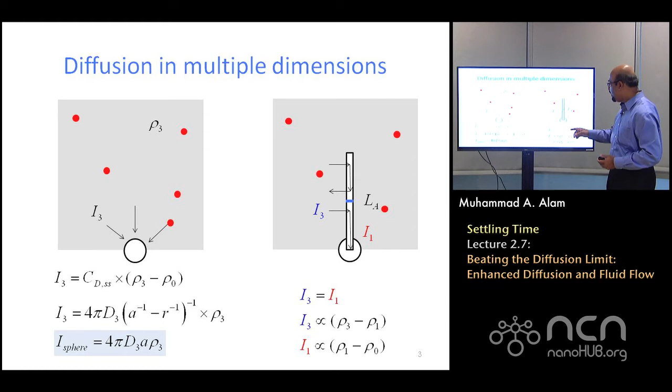We can easily calculate the first flux, since we've previously done the nanowire sensor. Remember when the flux came directly to the nanowire sensor? All we had to do was calculate the capacitance from 3 dimensions to 2 dimensions, essentially a cylindrical capacitance of R divided by A. A is the radius of this cylinder, and LA is the length over which the flux, once particles are captured, is directly transported to the spherical sensor. LA is not the physical length of the whole thing, because particles captured here are re-released, so it's as if they didn't count or didn't exist.

That's I3. What about I1? We have to think about it a little differently. Consider some particles coming in at a distance x from the sensor surface. They diffuse in one dimension from there to the sensor surface, and we'll call that Jx. The injection could occur at any x, so we integrate over it, and we multiply by 2 pi a to account for the surface of the cylinder itself.

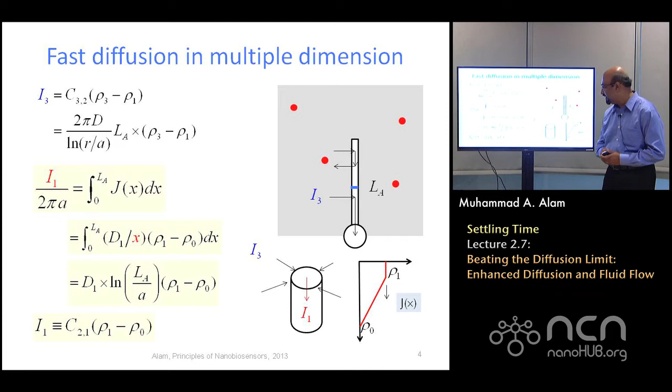Once you evaluate these two quantities, this is the diffusion equivalent capacitance in 1D. Rho 1 minus rho 0 is the density difference between these two points, and you integrate it out to get an expression for I1. Once you calculate I1 by integrating from 0 to LA, and you already know I3, you can equate them and find the value of I1, the flux to the spherical sensor.

This is relatively simple. We have the known values from the previous slide, C32 and C21. You equate them, eliminate rho 1, and directly calculate the value for I1. Now here's the trick: if diffusion on the cylindrical surface is faster than diffusing around in the volume, then D1 is significantly larger than D3. Substituting that approximation immediately gives an expression where C21 drops out, because this diffusion is so much faster that it's no longer limited by that process.

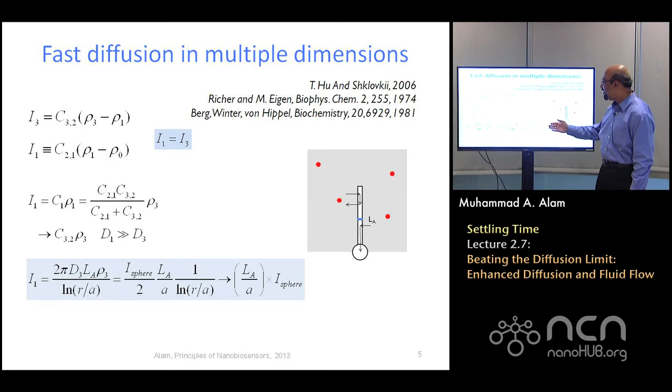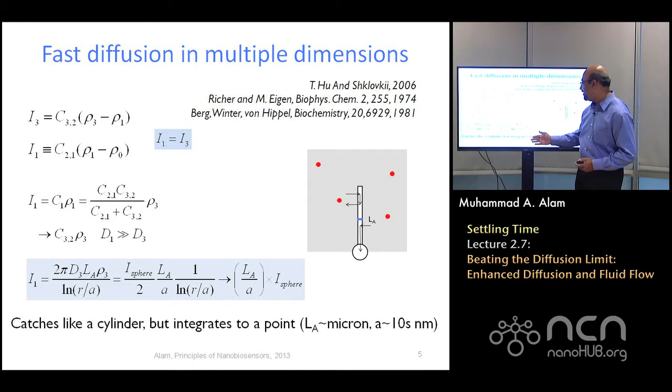It's essentially just limited by how long it takes for the molecules to swim in 3D and get collected by the nanowire itself. Once you substitute the expression for C32 and simplify, out comes a beautiful result: compared to the spherical sensor alone, putting this nanowire on top amplifies the total number of particles captured by the ratio of the capture length to the radius. If that turns out to be a factor of 100, we get a factor of 100 amplification in the flux rate. It catches like a cylinder, but integrates to a point, hence the amplification.

This actually appears to have deep roots in biophysics, this strategy of finding or diffusing to a target faster than you'd otherwise think possible. For example, you may remember from the second lecture we discussed DNA as a long polymer. Here is my DNA, a long green polymer, and on one segment there is a target, and this particular protein is looking for that target operator.

The protein could search for this place on its own by looking for the target in 3 dimensions, never landing on the DNA itself, interrogating it point by point. But it turns out there's a much better strategy: first land on the DNA, then slide along, and after a bit get detached, jump to a different segment of the DNA, and keep doing this. As long as this 1D diffusion along the DNA is faster than diffusion in 3D, it finds the target much faster.

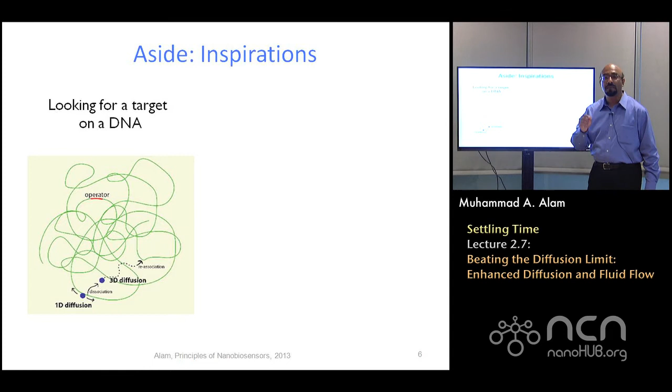Sounds complicated? Actually not. If you lost a child in a city that has subways, you wouldn't go around randomly walking in the city looking for the child. It's much easier to look for the child a little bit somewhere, hop on the subway, randomly get off at some other point, and look for the child again.

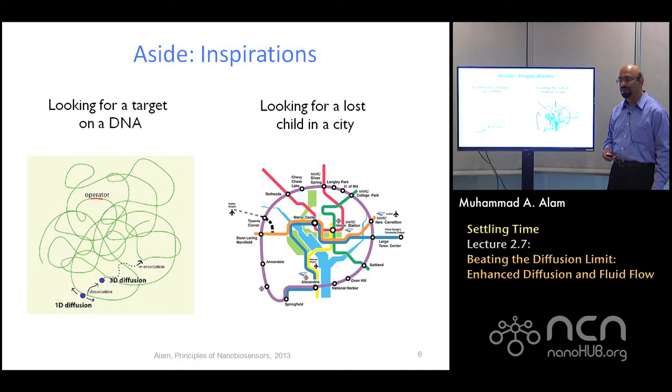So this interaction between 3-dimensional search and 1-dimensional fast transport is the essence of the amplification that let us beat the classical diffusion limit discussed in previous lectures. That's it, 3 techniques I told you about. There are others, but for now, these 3 approaches should give you an idea of the research directions people are taking.

Let's go on to the final topic, which has to do with how to bring the molecules to the sensor.

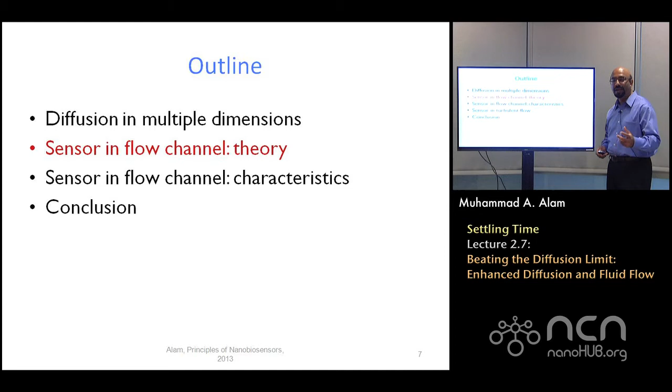Assume you have a sensor sitting in the middle of a flow channel, with fluid coming from one reservoir and going to the other. The molecules in the reservoir are very rare, and the fluid will bring the molecules to the sensor surface. You might think this would be better, because instead of sitting around like a jellyfish, the flow is bringing the food to the jellyfish directly. Wouldn't it be better? Wouldn't a nanosensor benefit from it?

You might think the answer is yes, but a little closer thought tells you the answer isn't so obvious. Because when the molecule is coming to the sensor fast, that's true, but the molecule is also going away from it fast, which counterbalances it. Do I win at the end of the day?

To answer that question, in the next 3 or 4 slides I'd like to do a simple calculation. Assume I've rotated the sensor, which has a rectangular cross-sectional flow channel, sidewise, so I'm looking at it from the side. The sensor is on the bottom, which was the circular disc. From the side it lies flat like a squashed rectangle. The fluid flow goes from 0 on one edge of the plate to the other edge, following a parabolic flow profile.

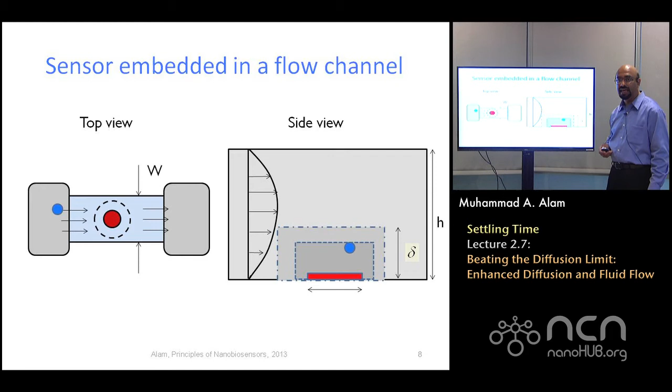But how big is delta, and how much enhancement do I get? Here is a relatively simple calculation.

To understand this calculation, let's quickly define a number called the Peclet number. It is essentially a ratio: if you did something versus if you didn't do anything. If you did something means you had a certain flow rate Q, divided by if you just allowed it to diffuse with no flow. The relative enhancement of the flow rate with respect to pure diffusion is given by this number.

Now, A is the radius of the disk, H is the height, and W is the width of the channel.

After some specific calculations are done, your result will be something like this: rho naught AD. If the velocity or flow rate was extremely small, then the result is essentially the same as that of a diffusion case. You can immediately see that.

Forget about when the Pe is small, I can drop these two terms. You can see 4 rho naught AD is essentially the diffusion result we have seen before for a disk sensor. However, if the flow rate is significant, where Q is large, Pe is large, in that case you can get a significant gain with a cube root of PE.

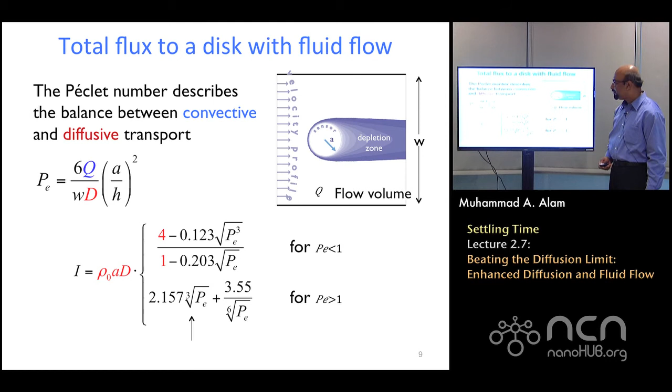Let me explain how that comes about. In order to understand how that comes about, you can compare two situations.

4 pi was there when it was a sphere or hemisphere. Here it's a disk, and you can look it up in any book, the capacitance of a disk in an infinite medium, and then it will be 4 D rho naught, 1 over A and 1 over R.

And the maximum value that this disk can get purely under diffusion will essentially be the diffusion. When the diffusion front is relatively large, I can drop it, and the maximum value would simply be given by 4D rho naught A. Let's say that's my value.

Would this be significantly better? The answer is yes, because this R will no longer go to infinity. Now the R will be pegged at the thickness of the stagnant layer.

So instead of simply saying A plus R, with R set to infinity, I will simply have A plus delta being the extent of R. And once you put it in, we'll get a ratio of these two quantities. And the relative enhancement of the flux, if you take the ratio of these two quantities, will simply be A over delta, essentially of that order.

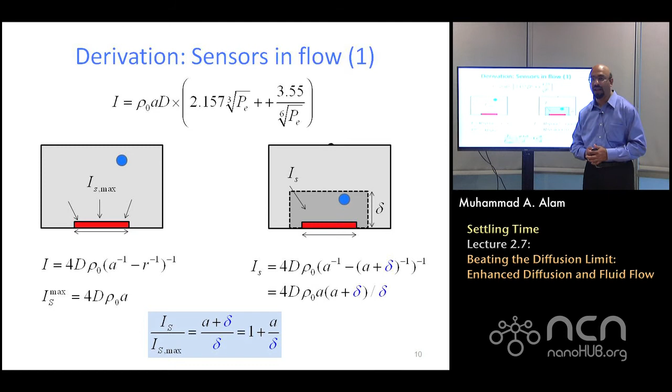Let's calculate very quickly. These are relatively simple calculations. We want to calculate what the value of A and delta is. My goal is, I already know A, the size of my sensor. Delta is what we are after.

So I want to know what the velocity at the top of this stagnant layer is. How do I do that? If I know the rate of change of velocity, I can multiply with delta. And once I calculate it, I will get an expression that relates the flow rate to the velocity and other geometrical factors.

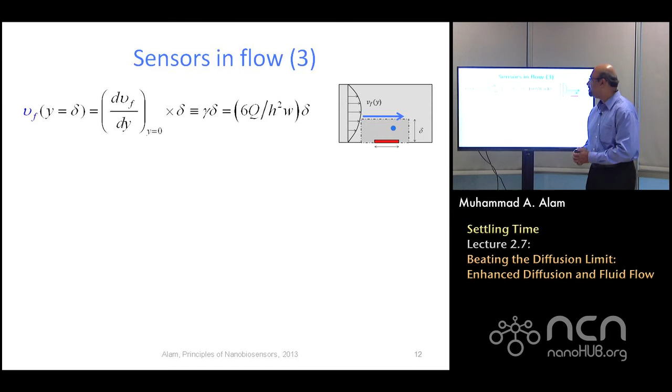Then you have to make a spatial argument. And the argument is the following: that the time it takes for a molecule to go from one side of the sensor after arriving, before it leaves the sensor and goes away forever, versus the time it takes to diffuse down and get captured by the sensor surface, these two times must be equal.

It's only then there will be a capture, because if the diffusion time takes too long to get to the sensor surface, it will simply disappear forever and it will never be captured.

So therefore, that argument is simply reflected by this: if delta is the distance, then the diffusion time is delta squared over 2D, and the transport time, tau c, is the size of the sensor divided by the velocity of the fluid.

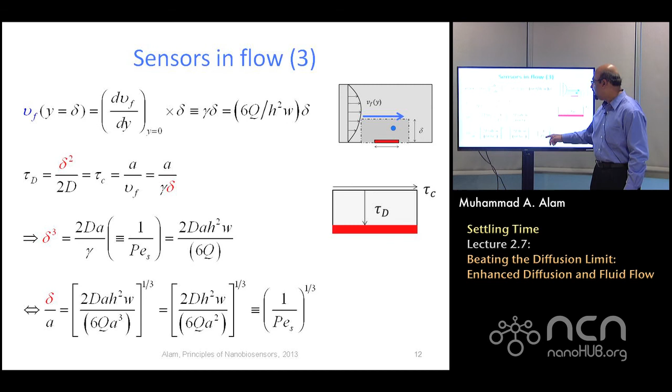And the velocity of the fluid I already know. I put it in, solve for delta, and there is my expression for delta over A, which goes as the Peclet number to the cube root.

So to wrap this discussion up, all you have to do now is put this expression in here. Imax I already know from the previous calculation. So once I put it in, I will get an expression that has the flux in terms of the flow parameters. You can take a log and see that if your diffusion coefficient is faster, you have larger flux. If you have higher flow rate, larger flux, and smaller cross-sectional area, obviously larger flux, and so on.

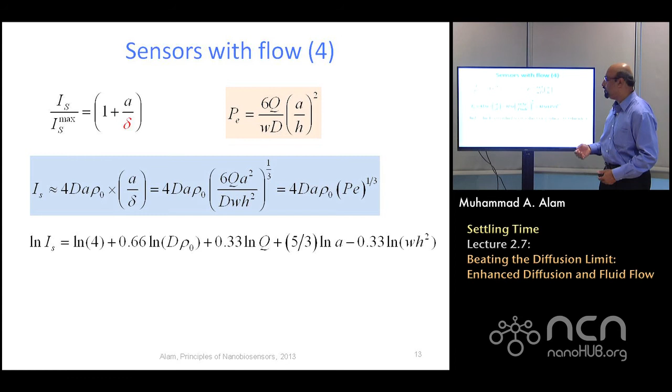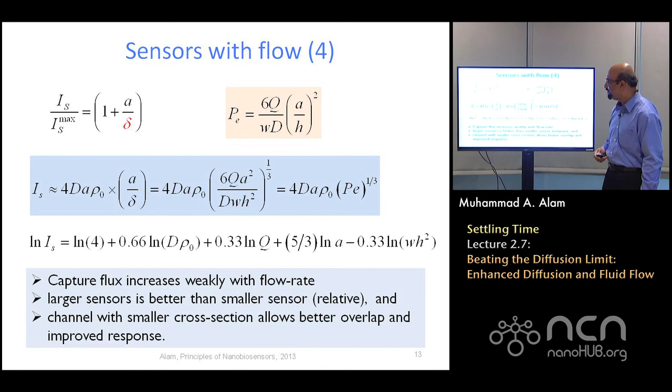But the relative improvement is what we are after. In a biosensor, does the flow help or not? Once we have the expression, we can answer this question. And there would be a big surprise for us. Let's see what we mean by that.

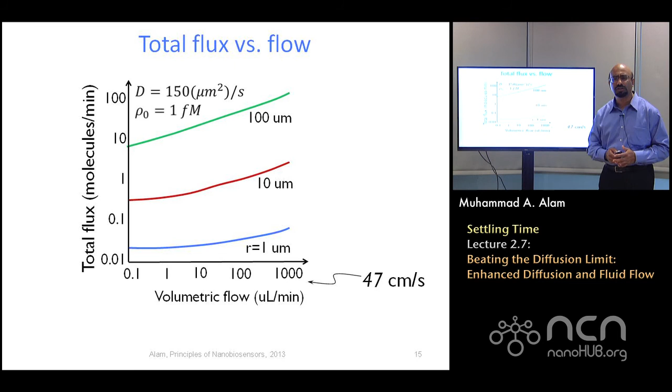Tremendous, that's significant. But as you go to the nanoscale, what you begin to see is that as your radius goes from 100 down to 1 micron, many of the nanoscale sensors are of that order, the relative gain, even at very high flow velocity, is inconsequential, very, very small. What's going on here? In fact, you'll see that this happens almost everywhere.

And the reason, which I'll explain a little later, is this delta relative to A. You see these two things: for nanoscale sensors, A is very small, so in order to get considerable enhancement, you have to make delta also very, very small in comparison. That means impractically high velocity, and therefore you don't get as much enhancement in the practical case.

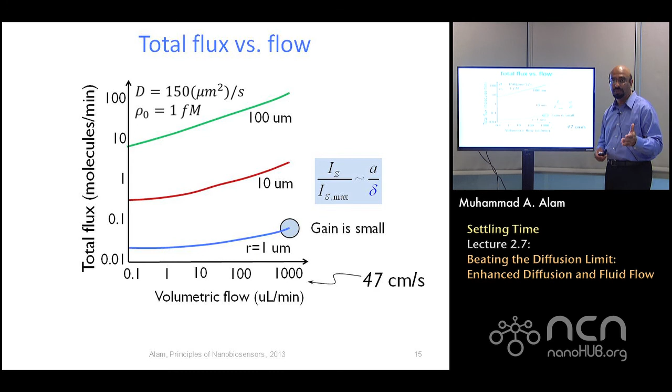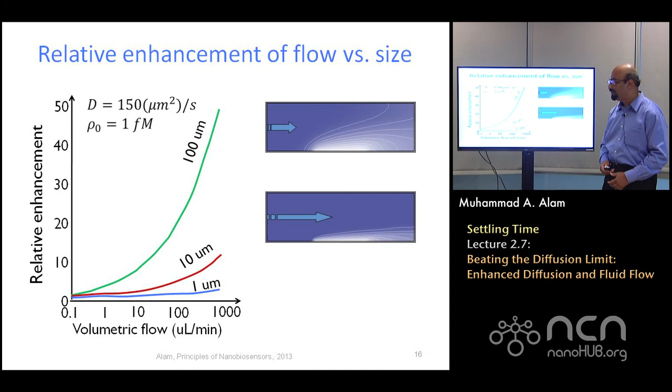You could plot the relative enhancement to check out how significant the gains are. The relative enhancement for 1 micron, as you can see, is essentially negligible. Yes, for larger sensors there's significant gain, but for smaller sensors, the blue line, not very much at all.

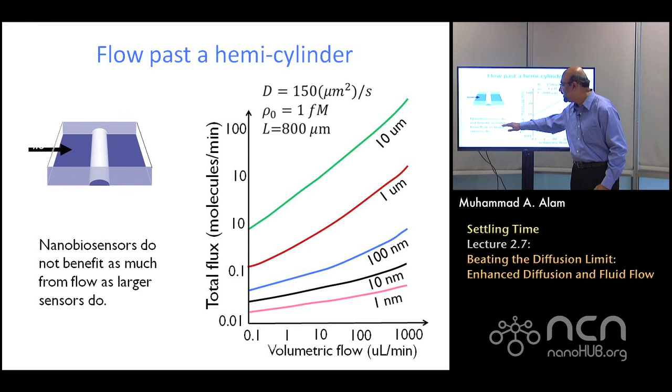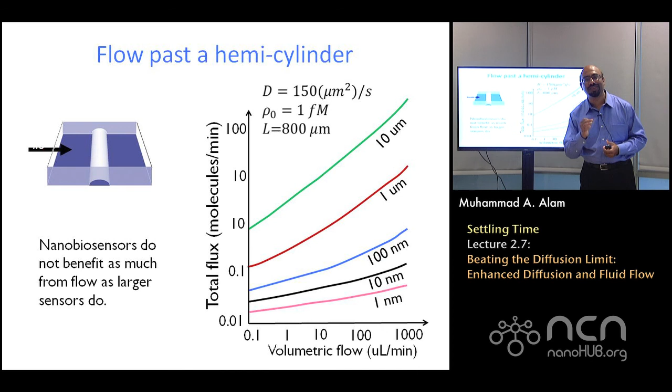So if you put, for example, cylindrical nanowire sensors in a flow channel, you'd see that as you go from 10 microns to 1 micron down to 1 nanometer, the gain is very small. And therefore, the main conclusion I want to draw from this analysis is that large-scale sensors benefit a lot from flow, but for small nanoscale sensors, putting them in a fluid channel, to the 0th order, doesn't give you very much. Let me conclude then.

The first topic I discussed today was this dimensional modification, allowing capture from 3D into a cylinder, letting it slide down on the cylinder, and then be captured by the nanosensor. That gives considerable enhancement, and this is biomimetic in the sense that in biology, DNA-binding proteins detect targets in the DNA exactly the same way.

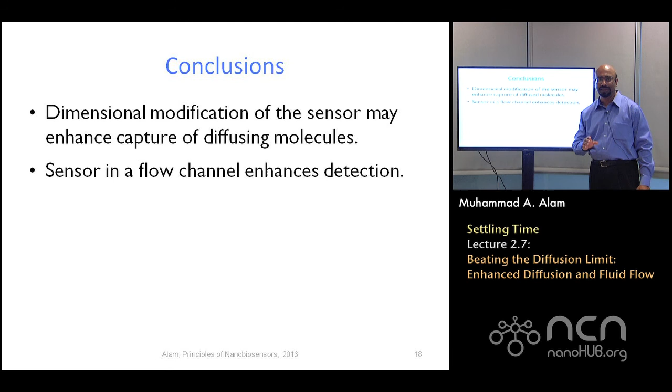Now, sensors in a flow channel enhance detection. There's no doubt about it, because you're bringing things faster. But the counterpoint is that it also gets away faster, and so there's a balance. What we saw is that for larger flow rate, detection is better, because it brings the molecule faster.

And you want a smaller cross-section. That makes sense, right? Because then the fluid will be hugging the sensor better, and the chances of the biomolecule actually getting caught by the sensor surface is improved.

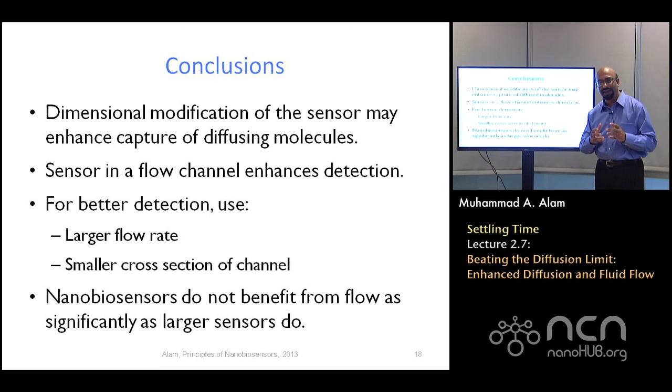But the point I really wanted to emphasize is that these nanobiosensors do not benefit as much as larger classical sensors. So this is another twist of nanobiosensing. Just like the diffusion limit was one type of twist that larger sensors generally don't worry about, similarly, this counterintuitive idea that flow doesn't help nanobiosensors is another aspect we should be thinking about.

Okay, that's it. In the next class, I will continue with this discussion of diffusion limits and how to beat it. Until next time, take care.